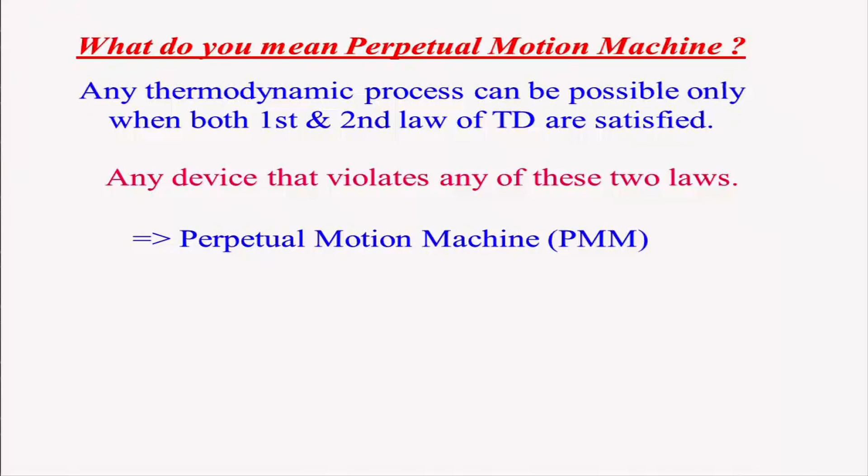Any thermodynamic process must satisfy both the first law and the second law of thermodynamics, as we have already discussed. Any device that violates either of these two laws is basically known as a perpetual motion machine. This means it would work all the time without absorbing any heat or energy from somewhere while doing some work, and that we call the perpetual motion machine of the first kind, because it violates the first law of thermodynamics.

If you look at, several people have approached, particularly in Western countries, where patent is a very big thing, or a mania I call it. And in our country we are not having any patent.

Do you know what is patent? That means if you find out something, you say it is my property, and if somebody uses it, he has to pay money. In our country earlier days it was not that. If you developed something, that was for the society, so that innovativeness can be propagated very easily. People can tinker with it and develop more. This is where we differ, but unfortunately we are now following that patent Raj, I call it.

Nowadays we are having several patents, for self glorification or gratification. So if you look at it, a lot of patents were being filed in Western countries for this perpetual motion machine. Even some people have gone so far as to invest money because they want to make money, so that if somebody is saying something jazzy, that also attracts investment.

If you look at it, gullible people are being duped by these so-called spiritual leaders. Somebody will say, look, I will give you everything without you needing to do anything. For example, somebody can bring a rasgulla and give it to you, just like that. You might have heard that kind of story, but those are not really possible, so far as the first law of thermodynamics is concerned. There is also a perpetual motion machine of the second kind which violates the second law of thermodynamics. The first one you call a perpetual motion machine of the first kind.

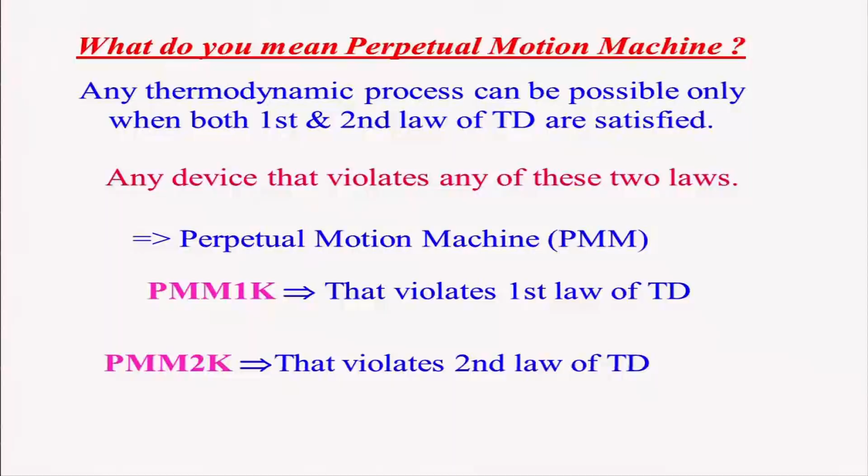We state that whatever amount of heat it absorbs from a thermal reservoir at a high temperature, it will basically be converting totally to work, which is not possible.

So let us consider a few examples. This is, as usual, a steam power plant, having a boiler, a turbine, a condenser and a pump. If you look at it, this closed kind of steam power plant produces some amount of work, and some work has to be consumed by the pump to elevate the pressure of the liquid coming from the condenser. Some amount of heat is going out from the condenser, and of course this heat is rejected. So this satisfies both the first law and the second law.

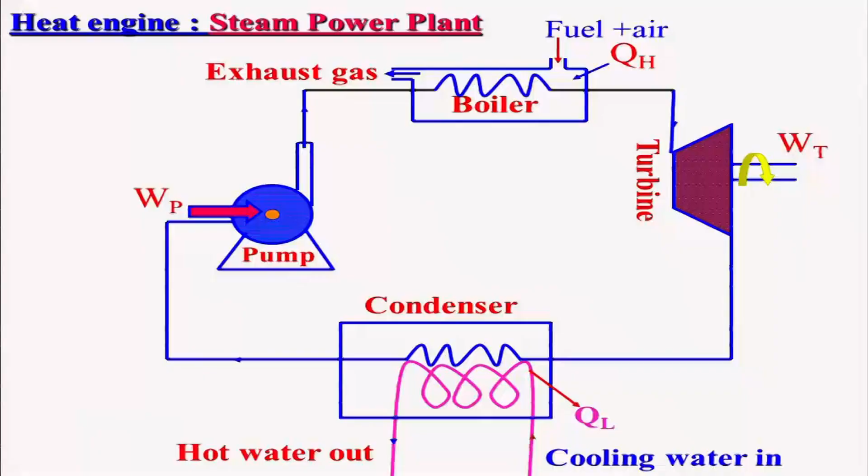But if we consider that somebody has changed this setup: instead of a boiler where fuel is burnt, now there will be resistors which heat the fluid, and some steam is produced, which is then expanded in a turbine, and then it goes to the condenser and gives some amount of heat to the surrounding coolant, and then it is pumped. This turbine is connected to the pump, meaning whatever power is developed by the turbine, a tiny portion is given to the pump to operate it.

So therefore there is no problem, and this turbine is also connected to a generator, and then you are getting the net work output. That means whatever it gives, some amount goes to the resistance, and the rest is net output.

Somebody has proposed that once you start this system, it will go on, because from the generator you are producing some electricity, and that electricity is used to vaporize the water to produce steam, which is then expanded, and it goes on. Is it really possible? What does it violate? If it is not possible, it will be either violating the first law of thermodynamics or the second law. So what is it violating then?

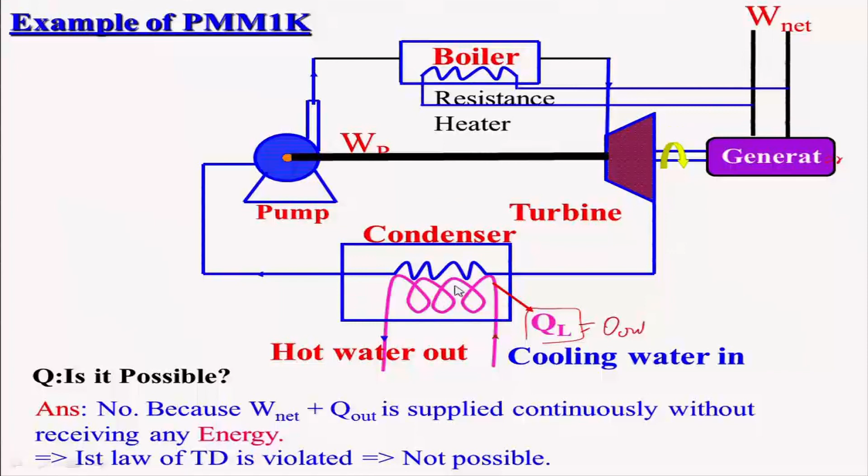So in this case, some amount of heat is being rejected in the condenser. They say, look, it is a wastage, because instead of having a condenser, from the turbine I will just directly connect to the pump. Some steam is being expanded in a turbine, and the same fluid I can put into the pump. So the heat which is rejected out, which is a kind of loss, can be utilized. Of course it is taking heat QH from some heat source, maybe combustors by burning fuel, or maybe from nuclear, from solar, any other place we can take this amount of heat.

So some amount of work is done, and it is not violating the first law of thermodynamics, am I right? So is it not a good idea to eliminate the condenser and connect directly the turbine to the pump, so that the fluid, after being expanded in the turbine, can be pumped back to the boiler?

Because you know that in the condenser, something more than 50% of the heat absorbed is being rejected. It is a large amount of heat being rejected. So is it possible really to do that or not? Because if some of you could do it, it will be a wonderful thing. Whatever the heat is coming out, if it is not rejected - if you look at the condenser here, it is zero, QL is zero. That means whatever heat is absorbed by the fluid in the boiler is being converted into net work.

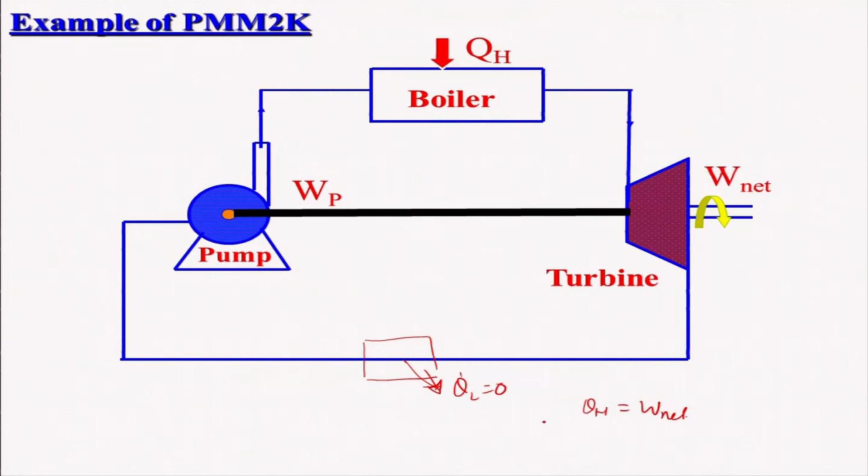So that violates the Kelvin-Planck statement. It is impossible to have a cyclically operating device that absorbs a certain amount of heat and does the equivalent amount of work. That means, in this case, QH is equal to W net. Of course, if it is so, then you get 100% efficiency - well, you can assume there is some kind of irreversibility or losses.

You can say, look, instead of 40% efficiency, let's say if 60% of heat is being rejected in the condenser, then naturally the efficiency will be something around 40%. Now instead of 40%, with this device you can get something around 100% ideally, but in reality you can think of getting around 80-90%, which is a good proportion. But however, it is not possible to have this device because the Kelvin-Planck statement is being violated.

So, therefore, this kind of machine is known as a perpetual motion machine of the second kind, which is impossible to have. Of course, if you go back in history, there are several people who have used their managerial skill and convincing power to garner money by making some very sophisticated device claiming they can do this. They have sometimes been successful in taking away money, and other times they have ended up in jail.

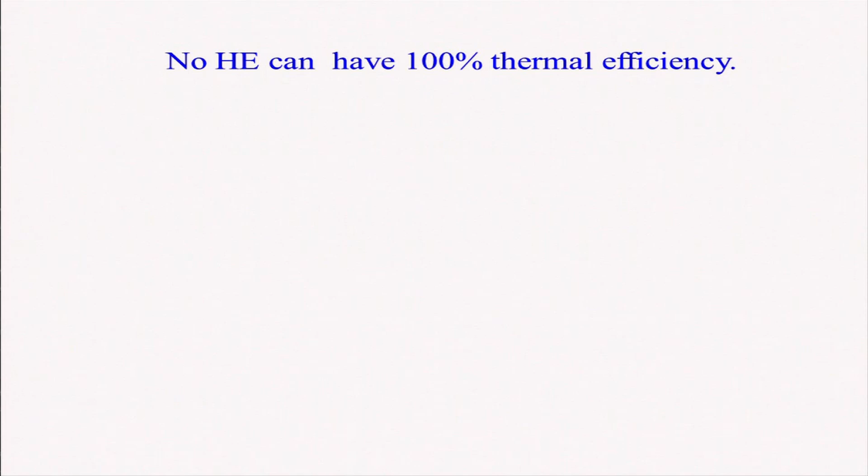So we have also seen earlier that no heat engine can have 100% thermal efficiency. That means, as we just saw, if an engine is absorbing a certain amount of heat from the thermal reservoir and does the equivalent amount of work, then only it will be having 100% thermal efficiency. But however, it violates the second law of thermodynamics. So, therefore, there will not be any heat engine which can have 100% thermal efficiency.

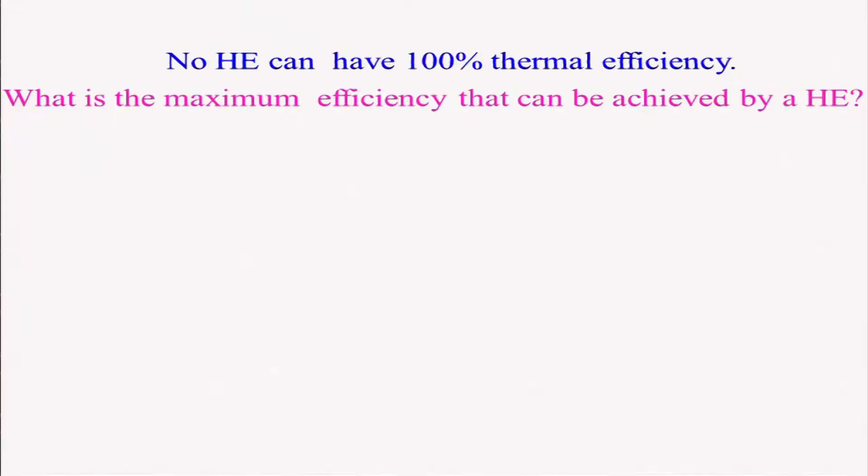So, therefore, the question arises: what is the maximum efficiency that can be achieved by a heat engine? How will we come up with that? Generally, a thought will come to your mind that it will be possible only if this ideal engine can provide maximum thermal efficiency, only if the processes are reversible. That means a reversible engine can have maximum thermal efficiency.

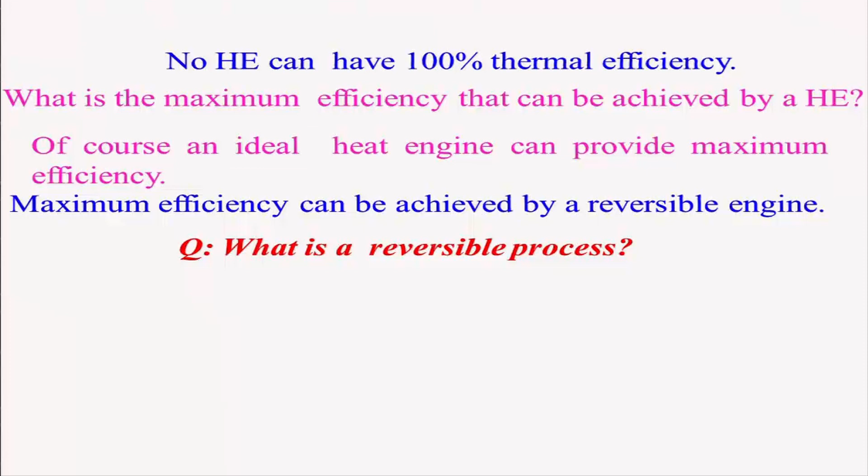So what is a reversible process that we have already discussed? Let me just repeat again, so that it will be engraved in your mind: whenever a system and surrounding are interacting with each other through work or heat, there will be some changes, and this interaction will cause changes both in the system and the surrounding. And if it is reversed back, then there will not be any mark either in the system or the surrounding - then only we call it a reversible process.

That means the system and surrounding will come back to the original state from where it was started. For example, if the system is interacting with surrounding, it was in state 1, it goes to state 2, then if it comes back through the same path from state 2 to state 1, we call it a reversible process. As a result, the net work and heat interactions will basically be 0 between the system and surrounding. Whenever it goes forward and reverse, the net work and heat interaction will be 0.

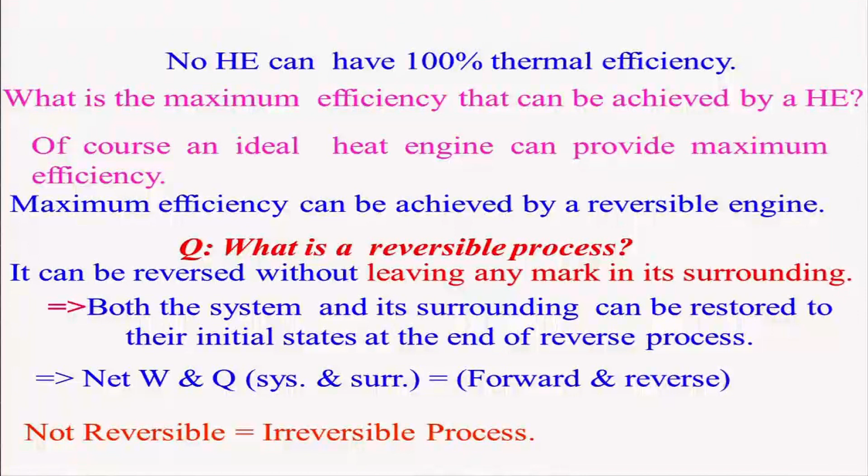Then only it will be a reversible process. So, if a process is not reversible, then we call it an irreversible process. So, therefore, we will be looking at some of the reversible processes and when they occur.

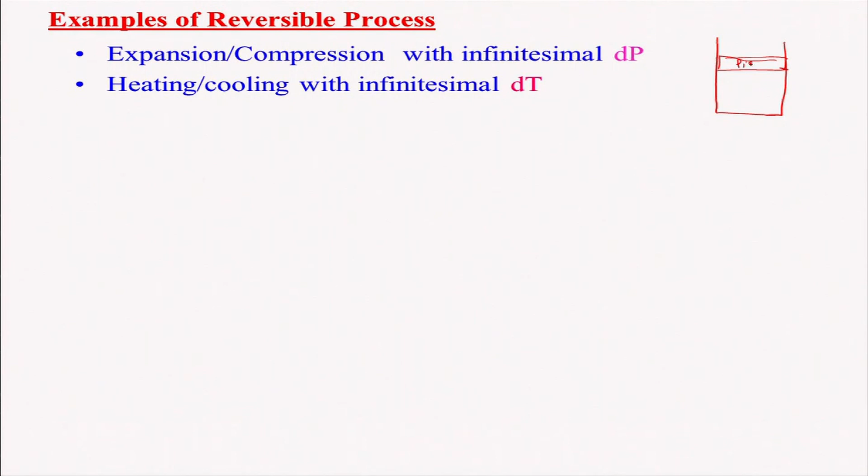So, we have already seen the expansion and compression with an infinitesimal pressure difference, and the process is quasi steady state. If you look at a piston cylinder arrangement, assume this is my piston and there is no friction between the piston and cylinder, and this is my gas. It is being expanded - if you give heat, it will expand and move up the piston. The pressure change, P minus dP, where dP is very small, and there is no friction in between.

And also if there is some heat transfer, that heat transfer gradient between the heat source - if there is a thermal reservoir source at some temperature - and the temperature gradient between the system and the source or thermal reservoir is very small, infinitesimally small, then only we call it a reversible process, whether due to expansion, compression, heating or cooling. This is very essential, meaning the gradient should be really very small.

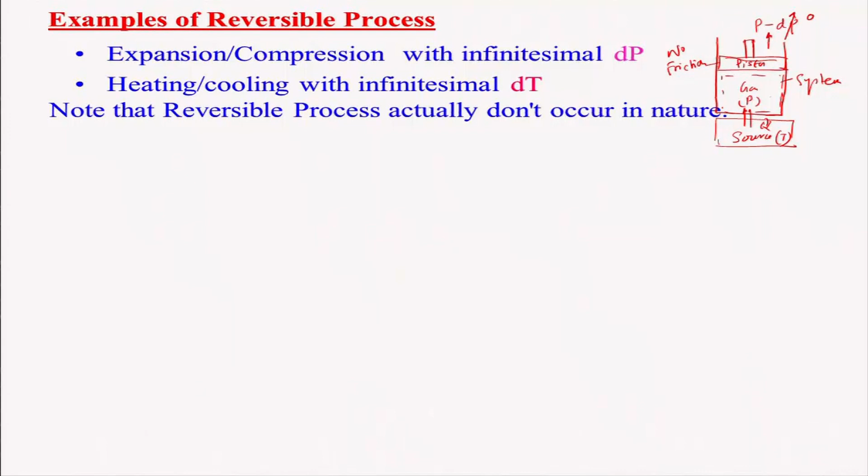And of course it is not really possible to have that, because all natural processes are irreversible in nature. But then the question arises, why do we look at the reversible process? And also another question comes to mind: how to recognize an irreversible process, because the reversible processes do not occur in nature, rather irreversible processes occur in nature.

Now we need to know how to identify the irreversible process. If a process can proceed in one direction only, it cannot be reversed back to the original thing, and that leads to the violation of the second law of thermodynamics, because it is not possible.

We have taken the example of a hot tea cup - if heat is transferred from the hot tea to the ambient air, you cannot get back the energy or heat which has gone into the surrounding, to reverse back and come back to the original temperature from its surrounding. So, that is the kind of thing we know.

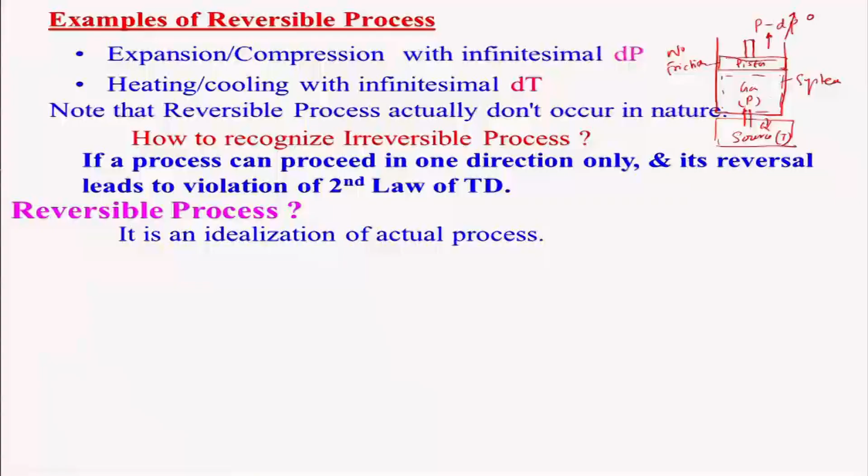A reversible process is really an idealization of the actual process, it is an ideal one and not really a real one. In other words, a reversible process really cannot be achieved in a real situation or in our day to day practices. So, now the question is why should we bother about it, why are we interested in looking at reversible processes.

If you look at thermodynamics, we are mostly looking at reversible processes and trying to solve problems by considering a series of equilibrium states, what we call quasi equilibrium states, because the actual process can be analyzed by considering it occurring in several equilibrium states, so that it is reversible. That way we can analyze it.

And it is used as a standard for comparing the actual process, because it is like a benchmark - one can achieve till that point, not beyond it. So, that helps us use this as a yardstick to say it can be done up to that. As a result we know that is the limit of the irreversible process, and that helps in telling that if somebody claims a process is possible which is beyond what the reversible process could achieve, then naturally it is not possible. So, we also use this in our day to day analysis.

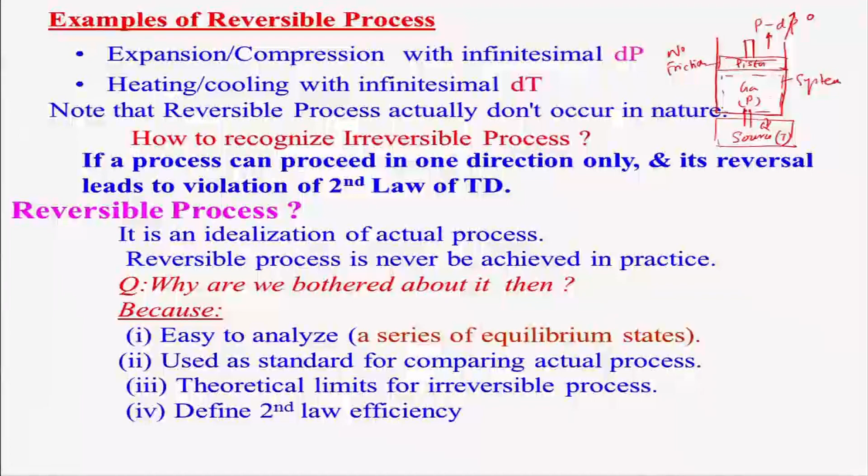So, for that reason we need to use this reversible process and work on it. We will have to also define a second law efficiency. We have already seen the first law of efficiency. Thermal efficiency is nothing but the first law of efficiency - how much heat is being utilized for producing work. But the second law of efficiency, which we will discuss a little later, will tell you what is the maximum one can achieve, or what is the scope for improvement for a particular system, whether it will be possible or not. That we will define a little later.

So for that we need to look at reversible processes. And if we know this second law, we will try our best to reduce the irreversibility in a system, so that our efficiency can be improved. And of course, that can be done by using your intelligence and design methodology you need to develop, and then various ways you can minimize the losses, or rather the irreversibilities, in the process, so that you can improve the performance efficiency of either a thermal system, a heat engine, a refrigeration system, or any other system, as a matter of fact.

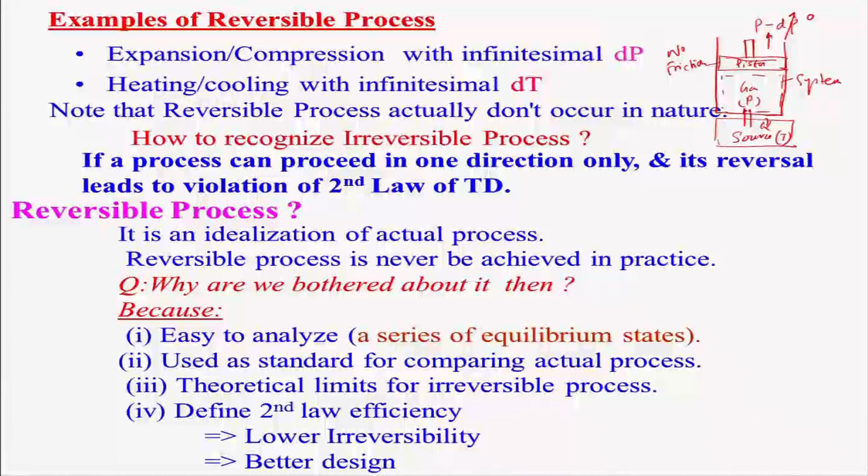So this is very essential to look at even in your life. For example, you might be working, so you are having some kind of a timetable, a dincharya - your daily life schedule. Suppose you do something in the early morning, your mind will be fresh; if you do it at night, your energy level will be low, so your mind will be sluggish and you cannot really do that. This helps in identifying your irreversibilities, or the losses. So what I would suggest is you should look at your timetable of your daily routine, and look at how you can maximize your efficiency such that you can utilize the time, and then you can think of the second law of thermodynamics for that.

So let us look at irreversible processes, because it is very important to look at them. There are various irreversible processes one can think of. As I told you, all processes in nature are irreversible, because a reversible process is basically a myth. So what causes a process to be irreversible? What are the processes, what are the causes?

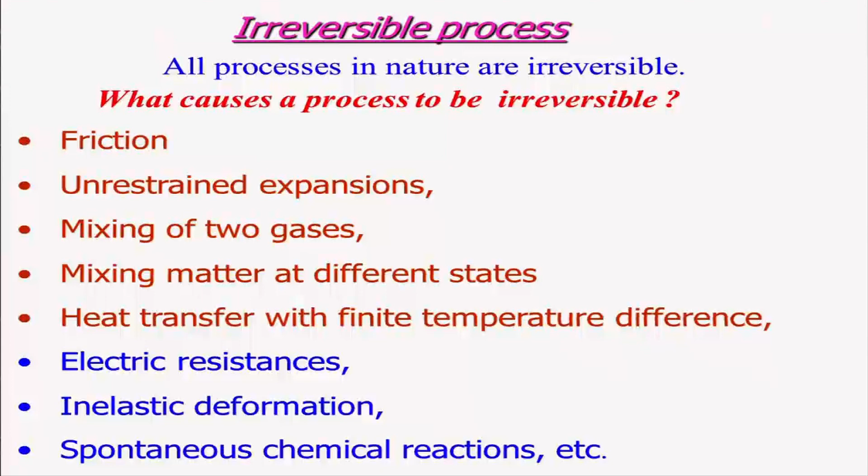And of course, chemical reactions that are occurring - they don't really have to bring things back following the same path. So spontaneous chemical reactions, nuclear reactions, and other things are basically irreversible. Just to give you some examples, even in your day to day life this can be connected. For example, if you are trying to do something very fast, you won't really do your things efficiently, or you are doing it in a hurried manner, so that you will be dissipating a lot of your mind power for that.

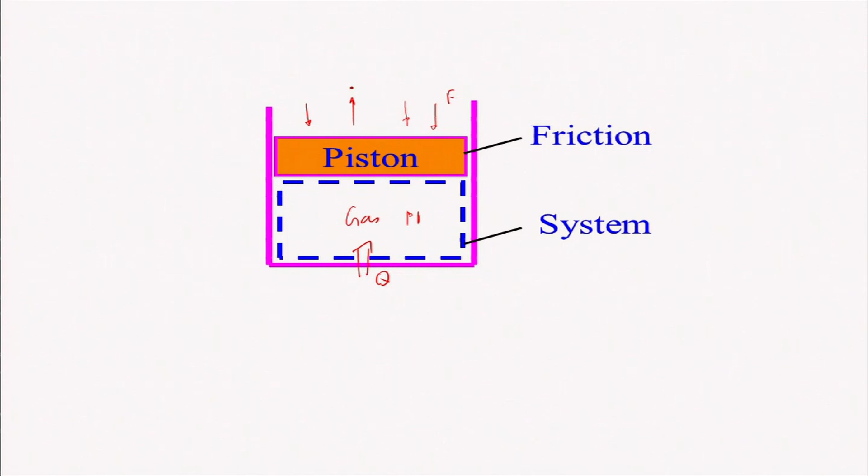For example, like friction - if you look at, all the time whenever we are considering a piston and cylinder arrangement, let us say this is a gas and it is being heated here, naturally the piston will go up if it is heated and insulated. So the pressure will rise, and you can think of some pressure force being applied here, and then the piston will be moving up.

We always say that between the cylinder and the piston there is no friction, but now we will consider there is friction. If the piston is moving, what will happen? It will rub, right. If it rubs both the surfaces, there will be some kind of work being expended and converted into some kind of heat.

You might be getting this feeling, like suppose I rub these two hands, what will happen? I get some little high temperature, warm kind of thing. So in the winter I always rub these things so that we get some more blood circulation, also with the friction we get this warm kind of thing.

And if some heat is being released here, if the piston is moving up, and now this heat, when this piston is moving down, what will happen? Is it this heat which is generated can be converted into work? Is it possible? Certainly no. So then what will happen? More heat will be dissipated, because it is a rubbing surface, and that heat being lost, that work which is being utilized there, it is being lost. And that is basically irreversibility.

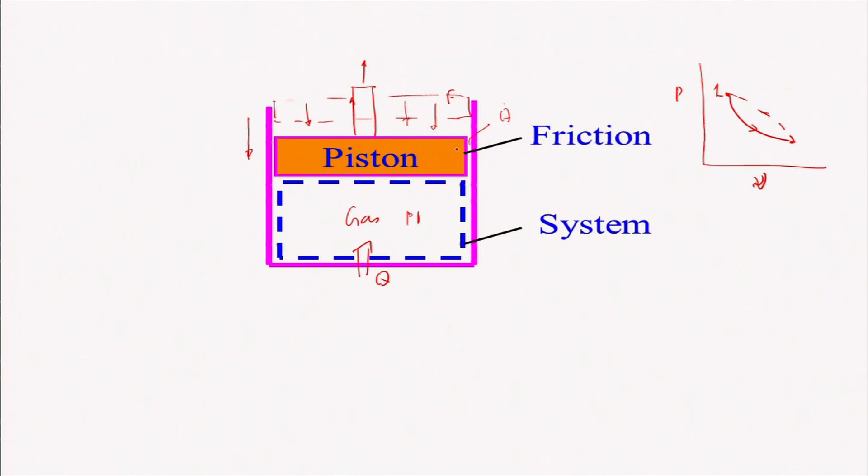Suppose you are having friction between your friends or between your teachers and other things, then what happens? You dissipate a lot of your energy in that. So these are the irreversible processes, and one has to avoid them. We always try to avoid friction in our day to day life to be more efficient.

So let us consider some non-quasi equilibrium compression expansion process. If you look at the fast expansion occurring here, the pressure gas which is here is being pushed very fast. That means if the pressure is P here, and this is P minus dP, and this dP is not 0. For example, if it is something around 200 kilopascal here, and let us say 150, dP is equal to basically 50. That means this pressure is equal to 150 kPa.

So that means it is a very, very high pressure gradient. That is the fast expansion, and that we do particularly nowadays in our life also. We want to expand our business, we want to expand our knowledge at a very faster rate, and we want to have a very higher growth rate. That is what is going on, and that will be irreversible, and that will be causing, because anything faster, a lot of stress being generated among people because of leading a faster life.

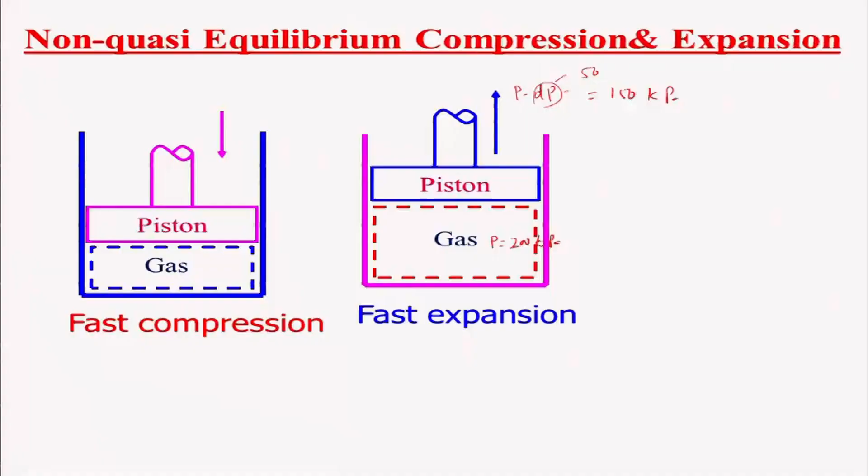So also in the expansion, and so also in the compression. If you look at compression, fast compression also will be taking place at a very, very high pressure. Let us say P is here and P plus dP, and this dP is a very high value. So therefore, again irreversibility will be occurring, although you may assume there is no friction, even though there will be irreversibilities. And of course friction will be there, and therefore in the real situation it will be having.

But at the same time, if in an actual system I use quasi equilibrium, the pressure difference during the expansion is very, very small, then it will be very slow motion, the kind of thing which people may not accept. So however, irreversibility goes on, if you go for either faster expansion or faster compression kind of process.

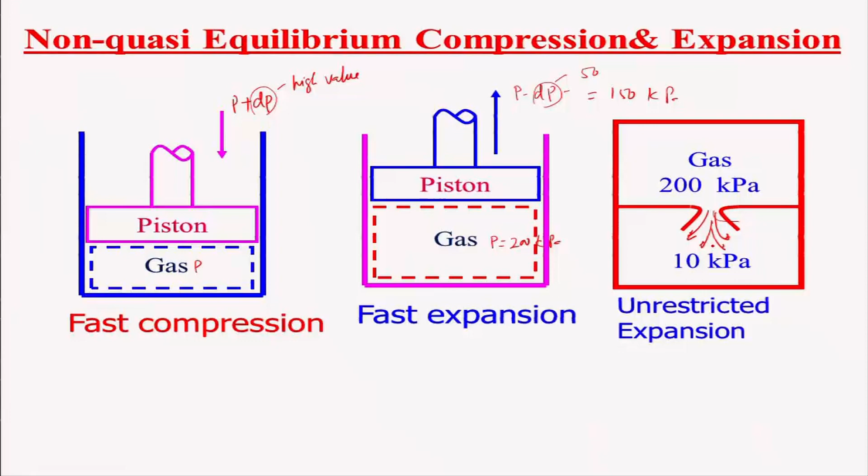And there might be another irreversible process, that is the expansion, if there is a partition between these two gases, like there is a hole here, and the gas will be coming out from higher pressure to the lower pressure. So what will happen is there will be a sudden expansion, an unrestricted expansion. So therefore there will also be irreversibility. That means you cannot take it back, after it reaches the equilibrium pressure, you cannot take it back to the original one by following the same path.

So let us look at some heat transfer problem. Let us say there is a cold drink which is at 5 degrees Celsius, and the ambient temperature is let us say 45 degrees. Some amount of heat is being transferred such that the cold drink which was at 5 degrees Celsius will go to 40 degrees Celsius.

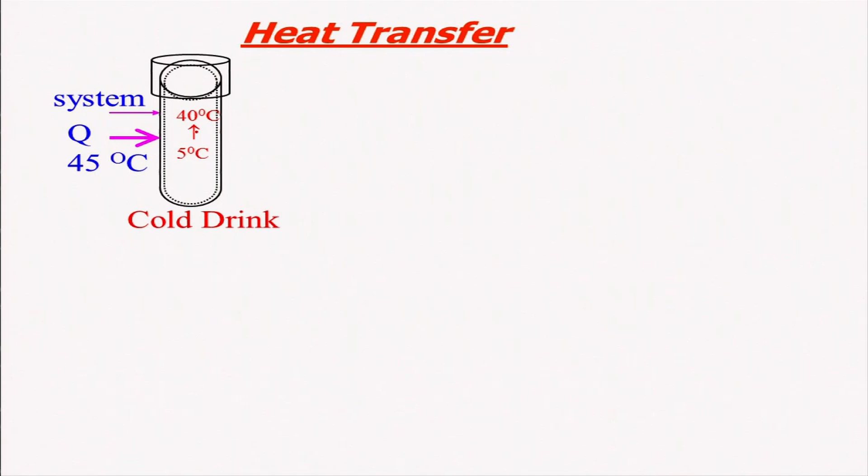That means heat being transferred out is not really possible, as I told, that the heat energy gained by this cold drink will really be transferred to the surrounding. If you look at this surrounding, it is at 45 degrees Celsius, the ambient temperature. So therefore, that is not really possible. This is an irreversible process because the system can be restored to the initial state, but not the surrounding. Even if we try, by putting kind of things, the surrounding will not come back to its initial state. So therefore, this is an irreversible process.

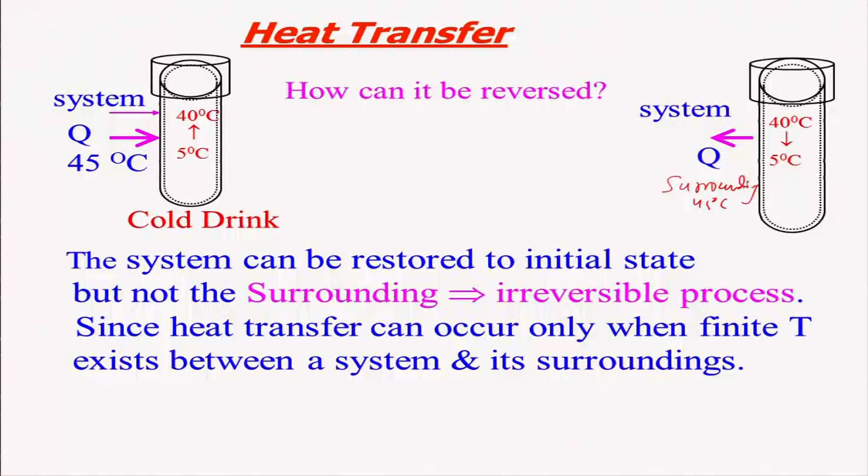Since heat transfer can occur only with a finite temperature difference between the system and surrounding, most heat transfer problems will be irreversible in nature, in the actual sense.

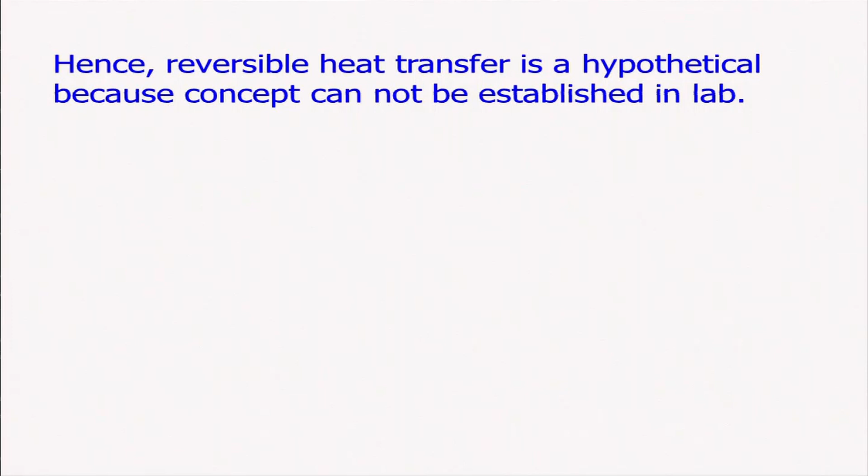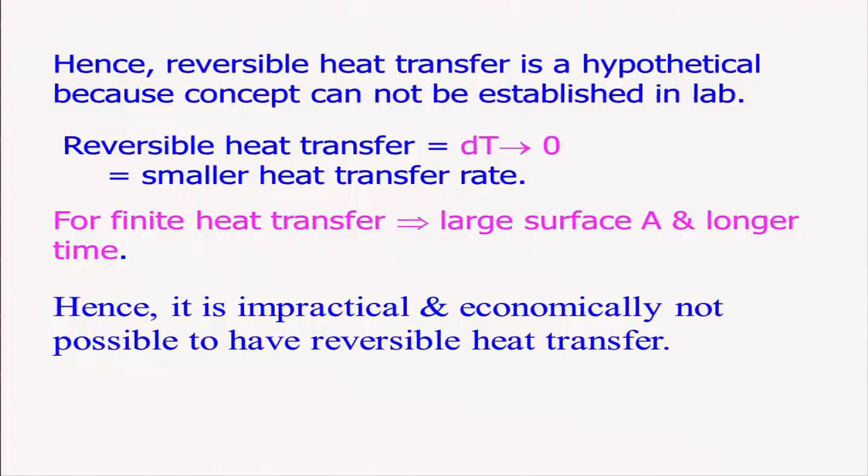So reversible heat transfer is basically a hypothetical concept because it cannot be established in the laboratory. If you look at a reversible process, it means delta T is tending towards 0, a very very small heat transfer rate. And if the heat transfer rate is small, you will have to increase the surface area to a very larger extent, and it will take a longer time because the temperature gradient is very low. For example, if there is say 0.5 degrees Celsius difference, dT, between the system and surrounding, it will take a lot of time and also require a larger surface area. Hence, it is impractical and economically not feasible to have reversible heat transfer. It is not really possible to have this.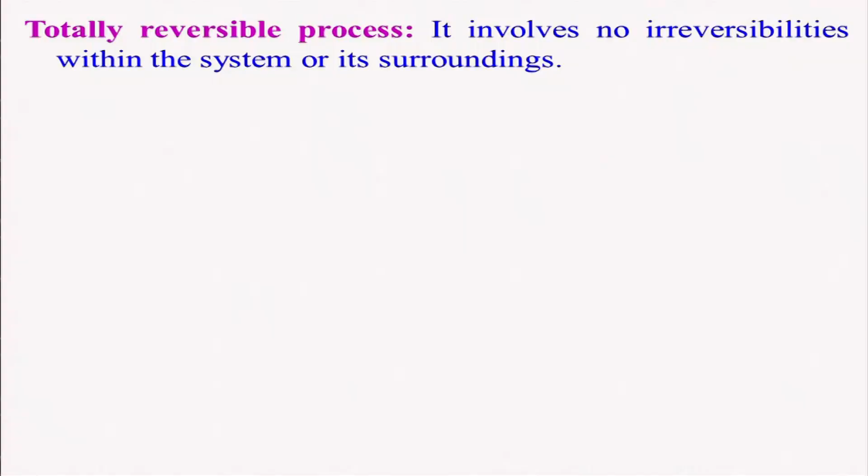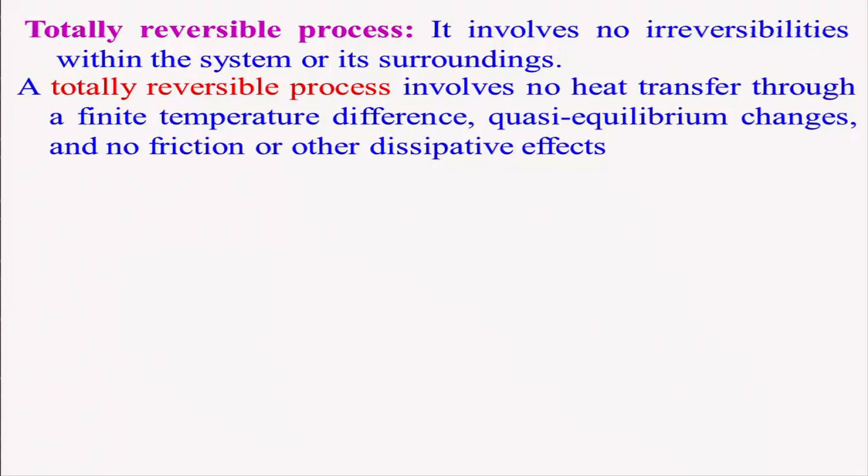So let us now look at when we can call a process totally reversible. It is possible only when there are no irreversibilities within the system or its surrounding, meaning both the system and surrounding should return back to their original state without any marks on it. That is really not possible. So one can think hypothetically only when the process is occurring quasi-statically, with no friction or dissipative effects, and the heat transfer is occurring with a very very infinitesimal temperature difference.

For example, take this hypothetical case, nobody will actually do what I am showing here. This is a piston and cylinder arrangement with gas at 25 degrees Celsius, and this gas will be coming in contact with a temperature bath at 25.0001 degrees Celsius - a very very small, negligible difference. There is no friction in this piston and cylinder arrangement. The pressure gradient, the pressure difference between system and surrounding, is very very close to 0. So therefore, one can say this is basically a totally reversible process, one can assume, because nowhere is irreversibility present. This is a hypothetical situation, not an actual one.

We can consider another situation where it comes in contact with a 55 degree Celsius bath. As before, there is no friction here. However, the system boundary is maintaining almost the same temperature. If you look at this system boundary, these are all insulated, but heat transfer is taking place here, and this system boundary will be basically at 25 degrees Celsius. Therefore, you can say it is an internally reversible process, where no irreversibilities occur within the boundaries of the system, because the whole system remains at almost the same temperature.

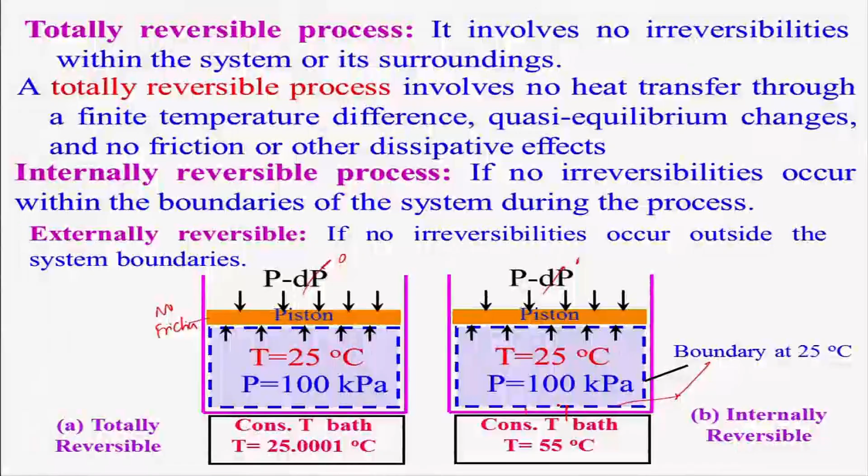But for this system, the surrounding at 55 degrees has a much higher temperature, so the gradient is higher, and therefore it is an irreversible process - this is externally irreversible, not really possible to have otherwise. But if no irreversibility occurs outside the system boundary, then we call it an externally reversible process, meaning there is no change in the gradient. So generally we will be considering internally reversible processes in our systems wherever we consider them, and I will stop here.